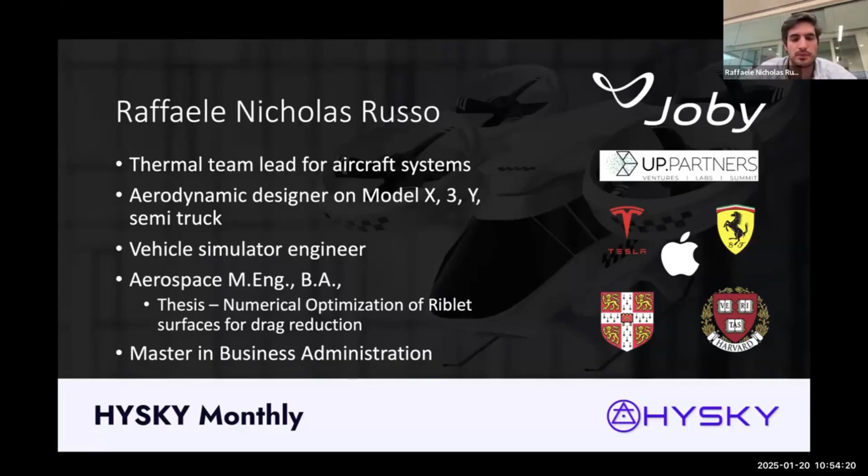Why hydrogen? Of course, this is HYSKY. Many of you come from the space of either hydrogen or aviation. I'm sure you've seen a slide titled Why Hydrogen a million times. I will try and make this as specific and tailored to what Joby believes, what I believe, what someone who's done the work believes. So in some sense, I don't just say this, I actually see it, having done a bunch of research and development on the space. But it really started in the public eye only last year.

Now, why hydrogen means a bunch of things. Let's start with the biggest one, which is, of course, fuel efficiency, weight efficiency. So you've seen forms of these slides in the past. I think what's valuable about this is comparing and combining the value of hydrogen compared to battery and compared to jet fuel, not just on the specific energy basis, but also the efficiency basis. So looking on the right, batteries are tremendously valuable for short ranges, and Joby still is pushing at full steam on the eVTOL product for urban mobility.

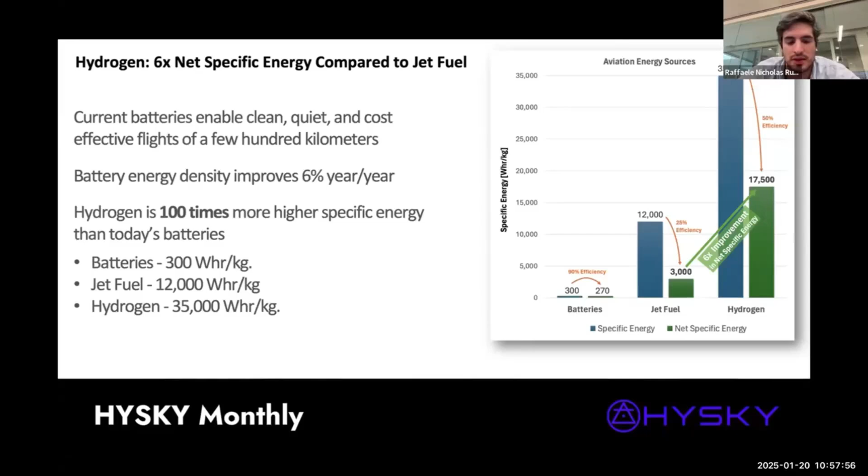Jet fuel is actually a third of the energy density of hydrogen, but what matters here is that the efficiency is about half. So when on the right you see the 6x improvement in net specific energy, what we're talking about is that hydrogen not only is 3 times more dense per unit energy, the actual amount that makes it to your motor, to your actual shaft power, is 6x overall. And to put this in numbers that are more directly applicable to something you may be more familiar with that isn't Joby, I'm going to jump back to this in a second.

Here's a comparison of the A350 and the A320neo. So roughly, in most of its configurations, the A350 has twice the range and twice the payload of the A320. The consequence of doubling the range and the payload from one aircraft to the other is actually a 4x increase in weight, roughly a 4x increase in upfront capital cost. And then that mission burns 6x more fuel. If you normalize that per passenger, we like to work a lot in per passenger per mile.

That means that it's still 2x heavier, 2x the capital cost, and 3x the fuel. What's very valuable here is the fact that we said it for batteries, you have a lot more batteries as you fly further. That's also a true statement for fuel. It's less appreciable. It's something that today we accept as the status quo, but hydrogen looks to improve this further than what jet fuel can, and basically get to a point where the vast majority of the aircraft isn't carrying everything else, it's carrying people.

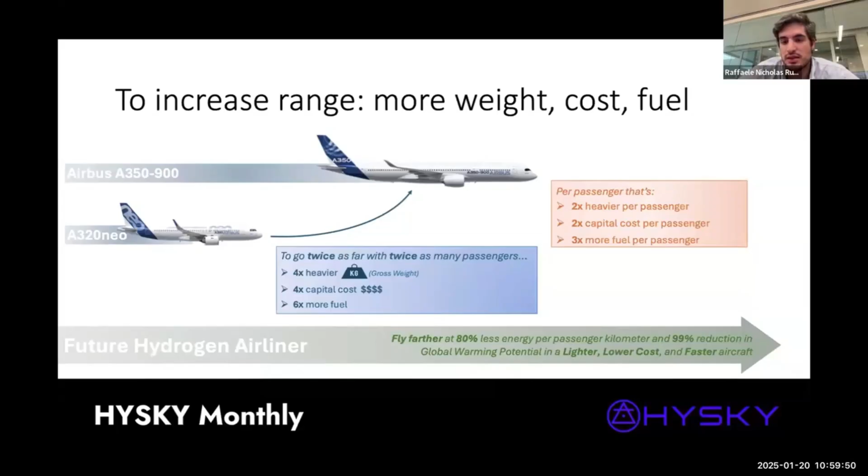So at the bottom, we have a future hydrogen airliner, or a generic one. You can fly further, only have 80%, but decrease 5x or have 80% less energy per passenger per kilometer. The other tremendous part, which I'll get to in the next slide, is the fact that we believe the reduction in global warming potential is up to 99% compared to a typical jet fuel powered aircraft.

You've seen this slide a million times. I will say, Joby believes this. This is front and center. What we're saying here is that many countries in the world have committed to net zero by 2050. Aviation today is only 2%. You can argue a lot of things today contribute a lot more. Wildfires are a much bigger proportion. Maritime transportation is a much bigger proportion. The electricity grid is a high proportion. However, it's one of the hardest to abate sectors.

So we don't have clean answers today on how to get that total number, meaning CO2 emissions in tons per year, not percentage, lower. A lot of studies I've read through and researched all suggested that aviation's 2% today is likely to increase to 10%. Partly because everything else is going to drop as they try and push to net zero. Partly because luckily larger shares of society are going to have access to travel, and therefore the actual total tons per year of CO2 is going to go up.

But if we can forecast pretty reliably that by 2050, while everything else is going to net zero, aviation is going to a higher and higher percentage of the total, we appreciate we need to start moving now. And that's part of the reason, alongside the efficiency argument I just made, as to why it's now. It's 2025, it's 25 years, it's not that far. We don't want to be the slowest person running from the bear, or the worst student in the room. Aviation's about innovation. It's about literally putting people in the sky. It shouldn't be the hardest to innovate sector. It should be ahead of the curve, and be a leader in the path to net zero.

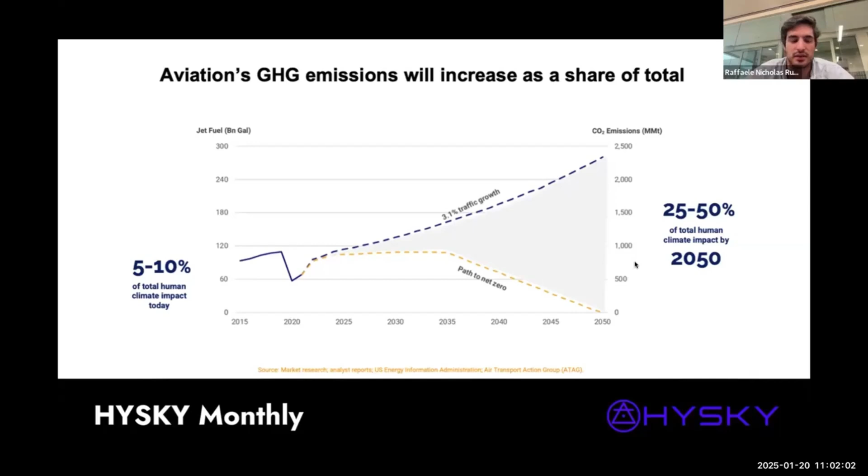An additional point on the emissions is the contrails part. This is something that has a lot of research backing. There's also research against it. Luckily, a few companies and research centers are trying to answer this question in more detail. Contrails are the clouds that form behind aircraft. Depending on conditions, altitude, humidity, they have a tendency to dissolve immediately or remain and basically form clouds that ultimately have the same effect as CO2.

In the sustainability world, it's typical to talk about CO2 equivalent. What that means is not just the CO2 you're putting out, but actually what's causing global warming. Contrails do not have CO2. They have NOx, soot, water vapor, particles of all sorts, but not CO2, and yet they contribute CO2-like effects, which is why if you account just for CO2, you only capture a third of aviation's total climate impact.

All the studies converge. Some studies show 30%, some 70%, or between 1.5x to 3x. But most of the research agrees that on top of the CO2 emissions you see, double, so 2x for a total of two-thirds, is what you don't see, what contrails contribute by just forming. I'm going to leave this there, because how does it tie in? How does it change with hydrogen? What matters here is that you need to solve not just the CO2 emissions, you need to solve the contrails emissions equally or more importantly.

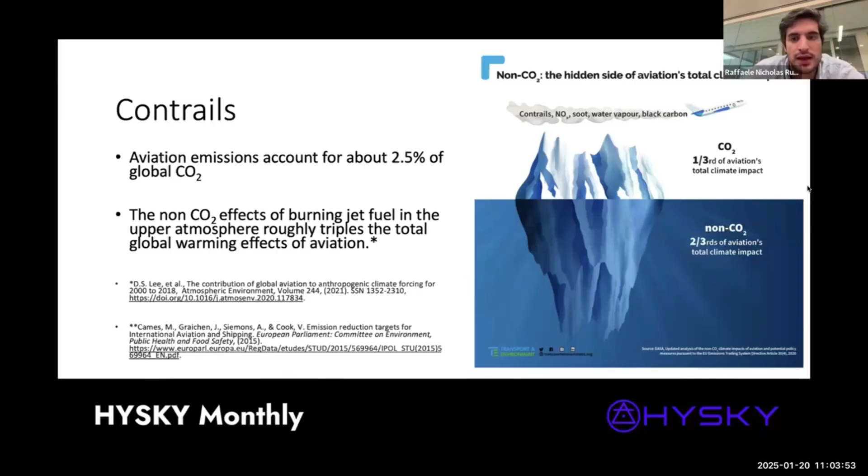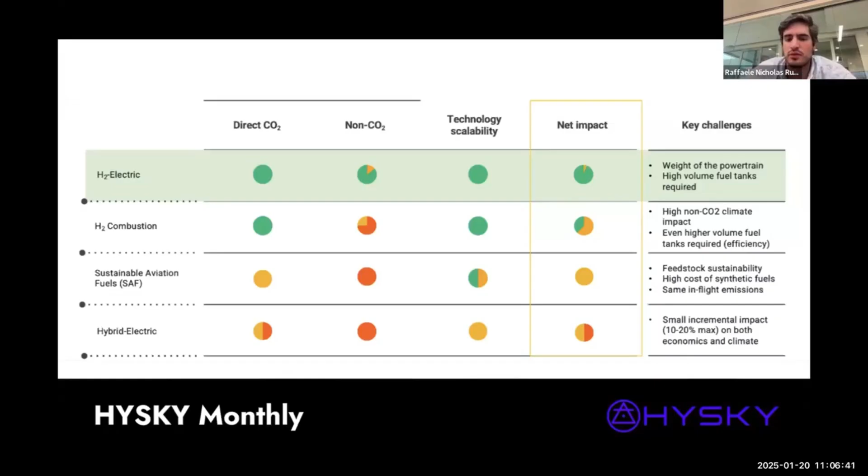What's tremendously important is that thermal efficiency is higher, which is also due to lower temperatures, and therefore a longer life expectancy, lower vibrations, and lower stresses. This is somewhat proven with electric cars versus combustion cars—the only reason you don't see it as much is because combustion cars have been developed constantly over the last 100 years, whereas these systems are relatively new.

When you're running something at lower stresses, lower vibration profiles, and lower temperatures, you increase the life expectancy. In other words, you don't have to replace your part every 5,000 flight hours, or sometimes 100 flight hours for some helicopters—you can increase those numbers higher and higher, so flight hour cost and direct operating cost drops down. Equally importantly, unexpected failures—sudden failures rather than life expectancy—decrease significantly. Joby's number one value is safety.

Both the electric and hydrogen aircraft put safety front and center. But there's a physics benefit to running low temperatures, low stresses, and low vibrations, which is that you are just decreasing your failure rates.

The last two points relate to a key part of Joby's architecture: the six prop design. Fuel cells are quiet except for the compressor, meaning less noise for passengers and surroundings. Also, having six props compared to a larger single prop for a given thrust is significantly lower noise. Thrust goes with the third power of blade size, but noise goes with the fifth power, so making more smaller props actually decreases noise.

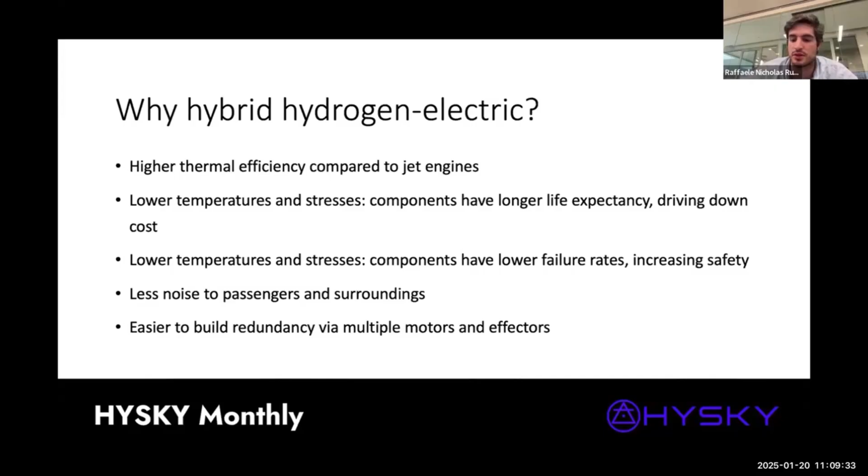There's also significant benefit, which I'll show more on in later slides, in that it's easier to build redundancy with multiple motors and effectors. Electric motors are easier to scale down in size compared to combustion, so it's not much more work to have six smaller props than one large prop, as long as you're flying electric. If instead you're flying with a combustion engine, you either need very complex axles and transmissions, or you leave a lot on the table in terms of weight by creating six separate combustion motors and effectors. So why should Joby do this?

Why does it make sense for Joby to jump into this hydrogen space? Why now? Why do I have a job at Joby doing this? This is what I want to talk about next. First and foremost, what does Joby do? What is Joby going to launch as its first product?

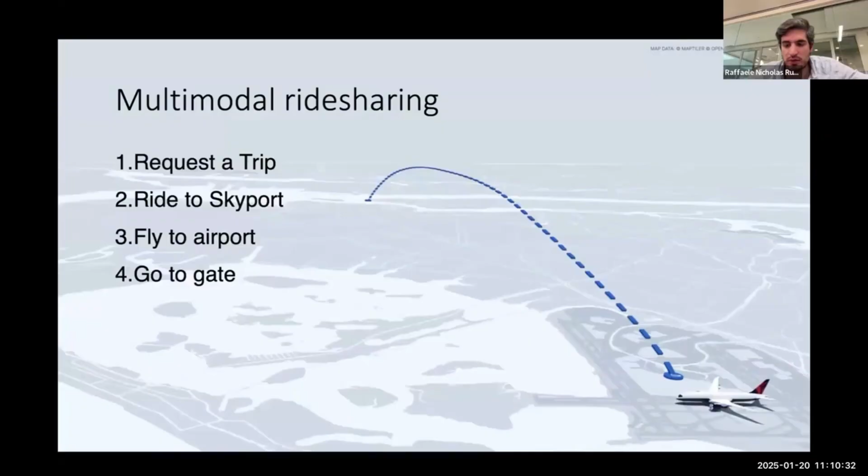You're in Manhattan, trying to get to the airport, you call an Uber, and that Uber takes you to the closest vertiport. There, an eVTOL, like the one shown, takes you to the airport and you're already at a gate. This example is with an airport, showing our partners Uber and Delta.

What really matters here is that today, and I've done it many times, JFK to Manhattan is either an hour and a half by subway, or probably even more during rush hour, and $100+ in a taxi.

The multimodal element of this will come back later with hydrogen, but the key thing is that Joby has already started, by acquiring Uber Elevate a few years ago, implementing multimodal ride sharing. All that means is we're looking at door to door, minimizing the time from where you start to where you want to be.

So you need various different things: a car, a VTOL, a commercial aircraft. All those options are integrated into what will be our product, launching in Dubai first and in US markets right after. This is significantly different from the model today of aviation travel, of most types of travel, where this multimodal element doesn't exist. So this is the product.

What does the aircraft actually look like? This is our eVTOL aircraft. On the bottom left, 100 miles is actually remarkable, and it's an industry leader for range. One key reason it achieves this is if you look, the props are oriented vertically.

That means when it takes off, it can take off without a runway. It takes off as a VTOL, vertical takeoff. You'll notice these props are actually hinged, so once you're in the air, the aircraft actually transitions to flying on the wing, it's called.

Flying on the wing, compared to remaining in this mode, which is basically the mode most drones fly in, is why you can get to these longer ranges. Flying on the wing is significantly more efficient in terms of lift to drag, in terms of distance traveled per unit energy, than flying purely as a prop. Other competitors are flying purely as a multi-rotor or quadcopter, different names for it, but if you remain in this vertical flight type of asset, you dramatically reduce your range.

If you manage to transition to forward flight like Joby does, then you get into the hundreds of miles range. You're not going to exceed this because, spoiler alert, electric is a lot less energy dense than it needs to be to go for 500 plus miles. But to get to the distances of large urban centers like New York, like LA, 100 miles is actually your perfect sweet spot.

In terms of speed, ultimately the goal is to save hours and minutes of travel, so it is significantly faster than ground travel. Additionally, and this is an interesting number, the average road trip is about 40% more circuitous, a longer route than flying in a straight line. In other words, not only are you saving speed, but you're saving time by increasing the speed. You're also saving time by reducing the distance, if you can fly generally in a straight line, avoiding whichever areas of your urban center you have to.

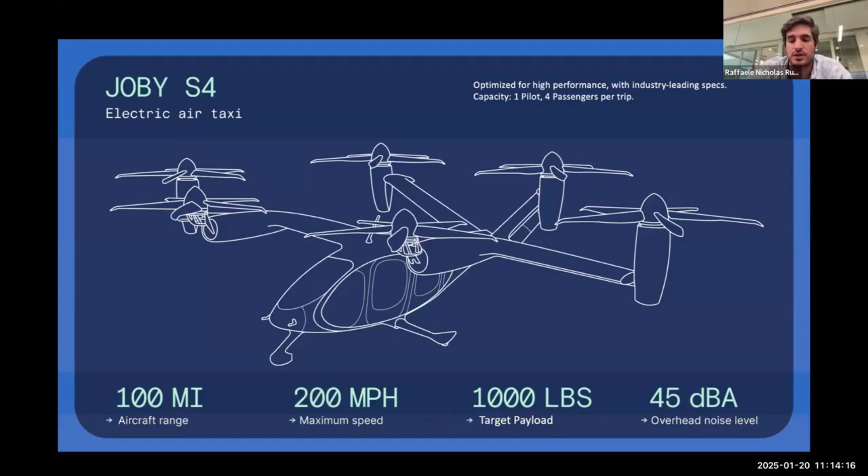Joby's doubled down on this. It invited NASA on site to do a bunch of studies on the noise profile of a bunch of aircraft. We have our own Cirrus SR, we got a few other aircraft and helis on board, and then we got Joby. As I mentioned earlier, having forward flight and multiple props actually decreases the noise by increasing efficiency and decreasing tip speed.

45 decibels is actually really, really quiet. You may find on YouTube various videos of JoeBen talking while the aircraft takes off behind him, and there's no weird sound production happening there. There's no targeted microphones. The aircraft is significantly quieter than anything with comparable capabilities can do today.

This element of safety of sound is something that Joby, well before I joined, identified as one of the most important elements for the successful outcome of this product, meaning people actually wanting them.

If this is too loud - a good example is if you've ever been to Rio, or even South Manhattan, there's a lot of helicopters, a lot of noise. The average population, the vast majority, doesn't fly in helicopters, so it comes just as a nuisance. Joby's actively looking to avoid that.

If it can be a product that doesn't disturb those traveling and those not traveling, it will be extremely more likely to be welcomed by society as a whole, because it's a net benefit - not a benefit at the cost of waking up in the morning to these. The element of importance of customer acceptance, of societal acceptance, is something that has mattered for Joby Electric.

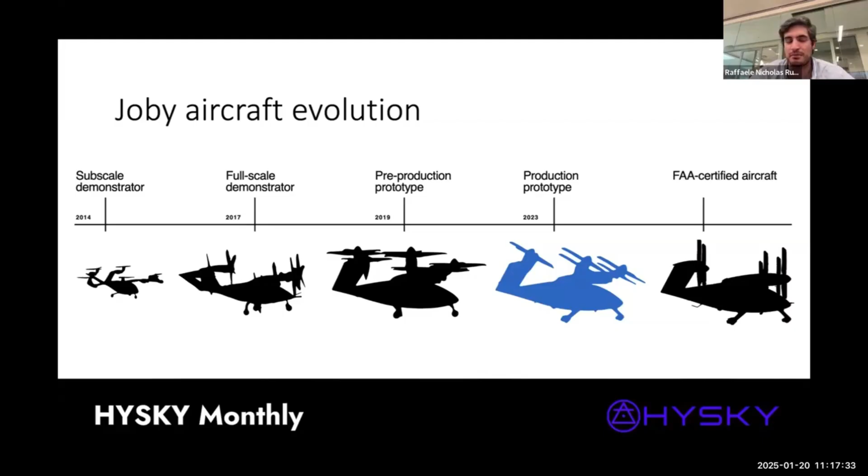A small part of it, which is my role, is the incubation and development of the hydrogen system. The biggest part of it is leveraging as much as possible of the amazing work Joby's already done with eVTOL. Lastly, this is partly by Joby and partly with a partner.

It was actually a spin-off. It's founded in 2015, but H2Fly already existed in the form of a DLR project with the same people that eventually founded the company, well before 2015, and had already demonstrated gaseous hydrogen flights before Joby acquired it in 2021.

Right around where I started working myself on hydrogen. Towards the end of 2023 in Slovenia, they actually worked with Air Liquide for a liquid hydrogen tank - the one I was mentioning on the left fuselage.

Then in 2024, and key for the stuff that's about to come, we worked super tightly. I visited a bunch of times, they came over, we had people on site permanently. They developed the H2F-175, the low temperature PEM fuel cell, that actually flew on Joby's hydrogen electric aircraft. That's the star of today.

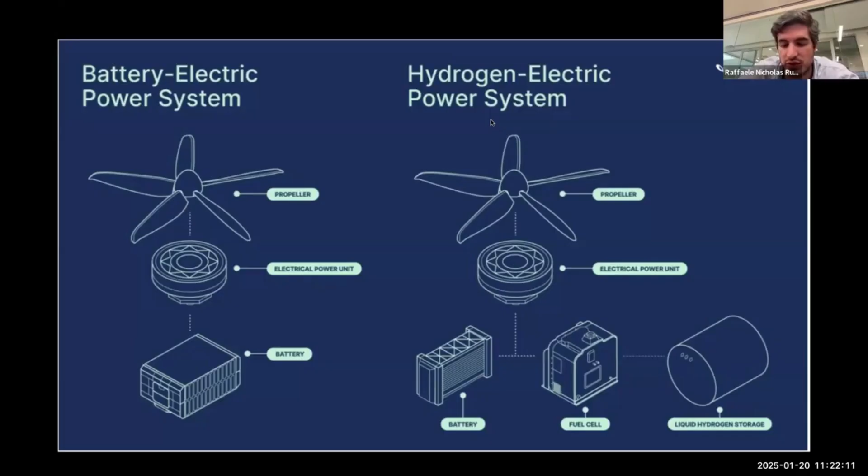And then, of course, we went for a storage system. We actually went straight for liquid, about 40 kilos in a vacuum insulated dewar. 40 kilos is a number that made sense for this prototype. Of course, plenty of discussions in terms of what the valuable mass is for onboard hydrogen for a production version. But the key thing here is that it's liquid. The mass fraction of the tank and the volume of the tank with gaseous, we believe, do not close or make a very hard case for hydrogen electric propulsion. So Joby went straight to liquid, jump-starting a team of hydrogen development for liquid storage.

It was as repeatable as possible in the sense that the operations, the safety, the procedure, all of that was well understood by the engineers designing it, by the flight test, the pilot. A lot of it was reused because that's the ultimate goal, to piggyback on all the great effort the electric part of Joby's done to optimize the hydrogen system and make a range extender.

So the aircraft that already flown, I mentioned there's a liquid hydrogen storage. Liquid hydrogen, for those of you who aren't super hydrogen nerds like most of us on the call, actually is stored at minus 250 C. That's around minus 450 Fahrenheit or 20 Kelvin. About 40 kilos on board.

As many of you know, there's a lot of technical requirements and complexities in storing liquid hydrogen at those temperatures. The system is actually designed to have a long lockup time, and this is a big challenge of the implementation, meaning the amount of time after which the hydrogen starts boiling and then venting off and you start losing hydrogen. Optimizing and increasing that time of lockup, the time you can let it sit, is a critical parameter because ultimately you want to get back to where normal fuel is, which is much like your car. You park it there and it stays for a while and you don't have to worry about boil off.

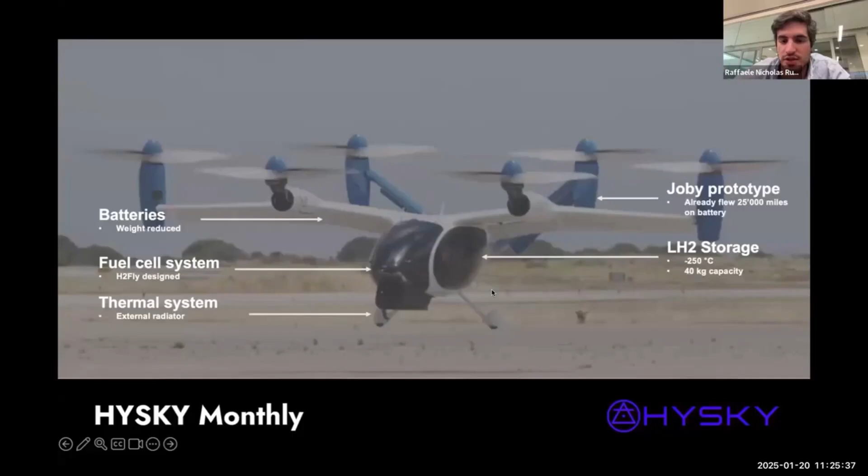And so we designed and retrofit this carbon fiber scoop that inside contains a radiator, as you can expect, rejecting that heat. One key thing I'll get to more in detail in a second is we had to build a temporary facility for aircraft storage and refueling. This is just the rendering, but the facility exists. I just didn't have an aerial view of the facility that looks as pretty as this one. This is actually what we submitted to the Marina, California Town Hall and Planning Commission.

Really, what you're looking at is a Chart trailer. I didn't put a photo because it looks like most liquid hydrogen trailers. And then the aircraft, both in its stored position as well as in its refueling position, which is roughly what's shown here on the left. The facility took a lot of work. I'll get to it in a second, but it was designed to be lightweight, simple, but safe and NFPA compliant, OSHA compliant. A lot of work happening there.

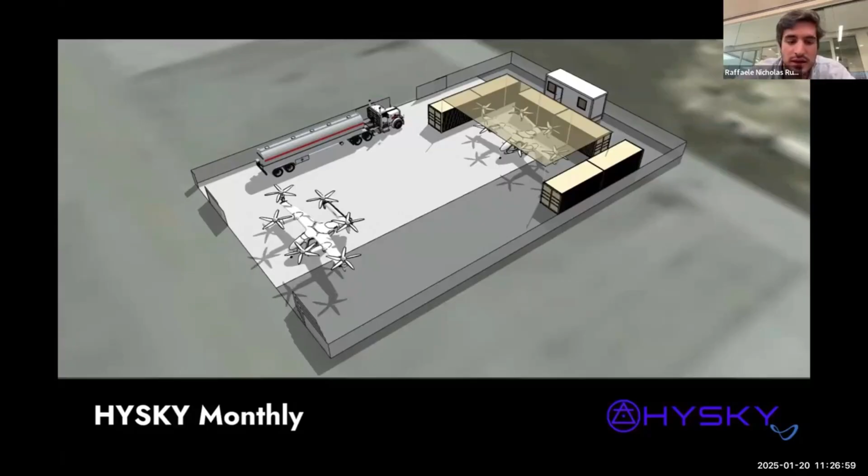The other thing that's worth noting is all this white versus the gray here. If you ever decide to build a facility for yourself, it's a lot easier to just do everything on concrete. Concrete, unlike asphalt, can take liquid hydrogen spills, can take liquid air spills, and doesn't react with it. So the safe answer is always to work on concrete. And that was what we needed. We needed to design the aircraft, retrofit as much as possible, reuse as much of the existing electric resources, get permitted and approved for this facility.

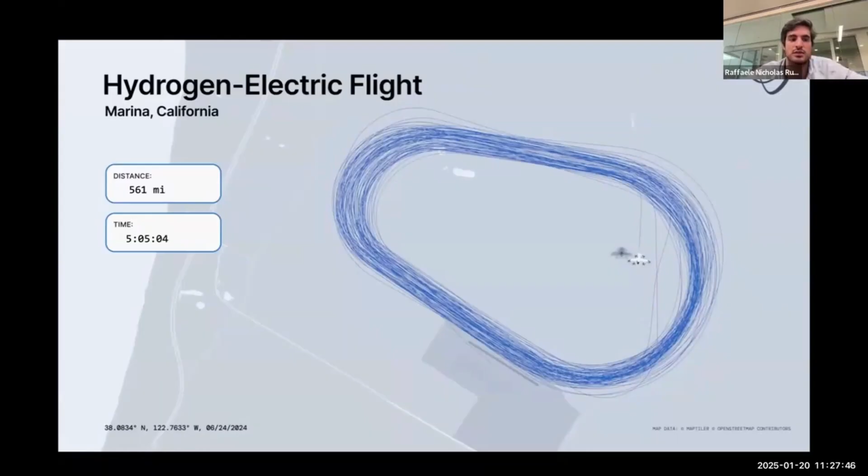And we were able to achieve a 5+ hour flight. So this is a rendering, but the aircraft did fly in this actual pattern. This is Marina, California. It's just north of Monterey, for those of you who don't know California, somewhere in the north-south middle of California. It's a beautiful place for Joby to be testing all of its aircraft, and specifically this aircraft. It would run circles of a few mile radius for hours and hours. It got boring after a while for the pilots and for the team to just watch this aircraft spin circles and do various flights at 500+ miles, the longest of which 561 miles for 5 hours plus.

The first thing is, as I've repeated a billion times at this point, the fuel cells are the key enabler because they make the best part of hydrogen and electric. Not just because Joby's already got a great electric product, but because the physics of it are just significantly better, because the environmental side of it is significantly more competitive.

The fuel cell development for all applications, maritime, ground, energy storage, and aviation, is progressing really quickly. Every week I speak to new suppliers that are coming out with tremendously valuable products. There's definitely an inflection point in fuel cell supply, whether it's H2Fly or external suppliers. There's a lot of development happening that will make fuel cell based aviation easier and easier.

Number two, for aviation, and that's not necessarily the answer for other modes of transport, but for aviation, liquid hydrogen is key. It does come with a penalty, especially the penalty of the boil off, the managing of it, design penalty and safety if not well managed, and additionally a penalty in the cost of liquefaction. But the mass fractions that are enabled by liquid hydrogen, there's no way around the mass fraction, meaning the weight of the hydrogen divided by the weight of the tank.

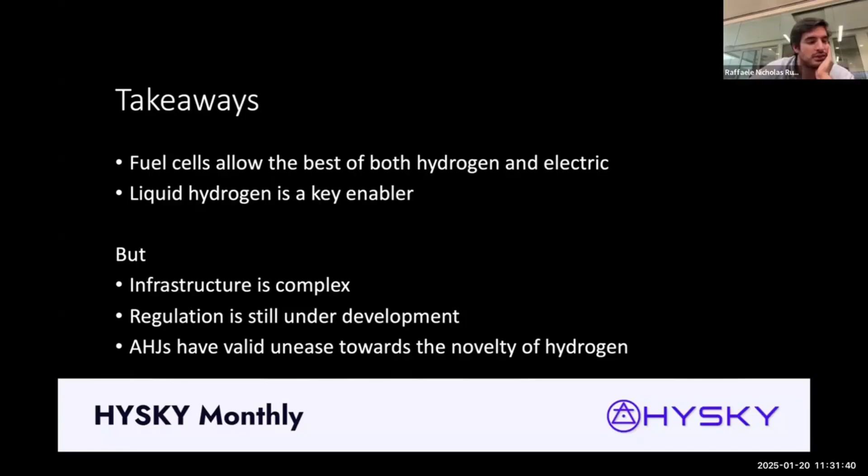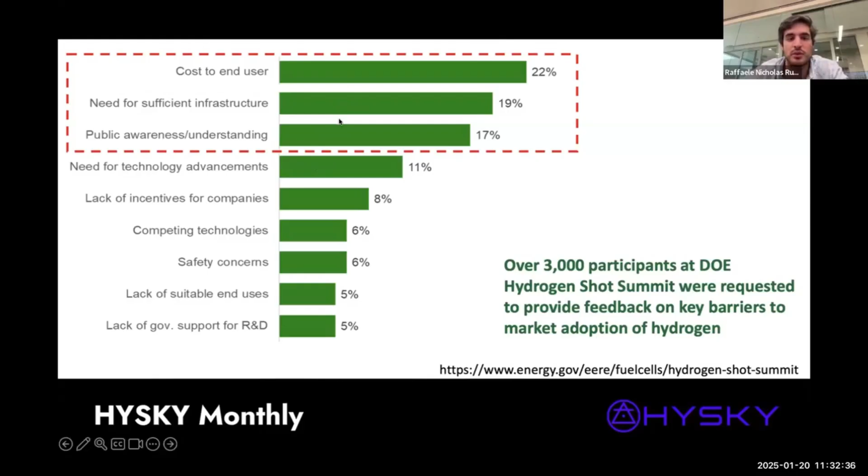This is the hardest part. Need for technology advancements is hard, and that's why Joby is here, why companies are working on it. The top three will require a lot more than just what Joby can control. Very lastly, what happens next? What's the goal of all of this? So I mentioned New York, and I promise we're almost at the end.

New York, as an example market, we build out as an electric aircraft company. We build out an infrastructure. That means you're flying from JFK to your party in the Hamptons, or perhaps to Jersey, or whatever it is in Connecticut. And from there, you've built a network of various vertiports where Joby takes off and lands. Some are helipads, some are recharging stations, and you have the multimodal service working. Joby expands its service from New York and starts building other localized networks. What does that mean? You can also do the same thing in Boston and within Boston and then in Washington.

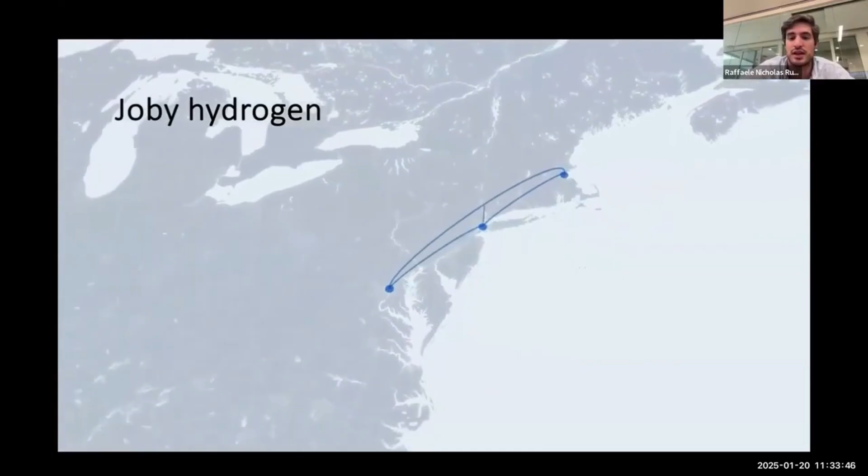Now, where does hydrogen come in? You're at this point in time where Joby's already built a bunch of vertiports, a bunch of infrastructure, a successful product on the electric. The Joby hydrogen system allows you to connect these. And yes, this is the range. It aims to leverage as much as possible of the existing infrastructure. It aims to work in tandem with the electric, in tandem with commercial aircraft.

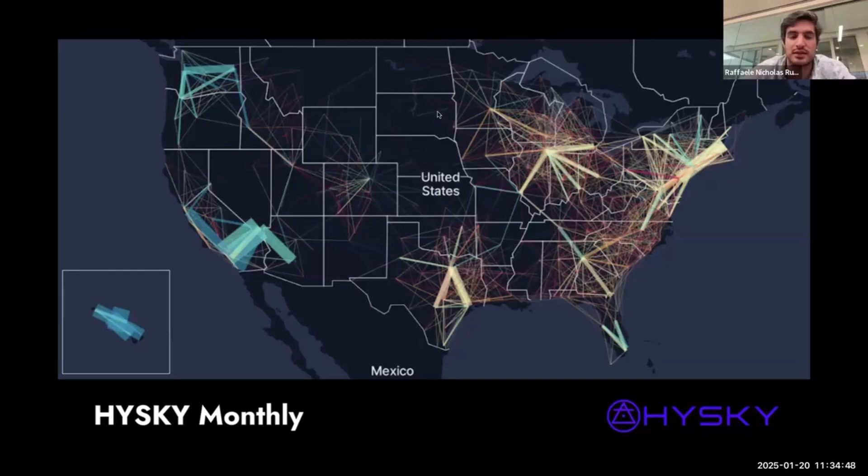The last slide I'll leave you with is Joby's mission is to save 1 billion people an hour a day. What does that mean with the electric product? That instead of sitting in traffic, you can take an electric aircraft to get to work and your commute goes from an hour to 20 minutes. What does that mean for hydrogen?

And these are numbers that I've spent time corroborating, right? How long the average trip to an airport is, how long the average time through an airport is, even for business travelers. And then realistically on the other side, how much of a granular spread can we provide these heliports for a hydrogen aircraft?